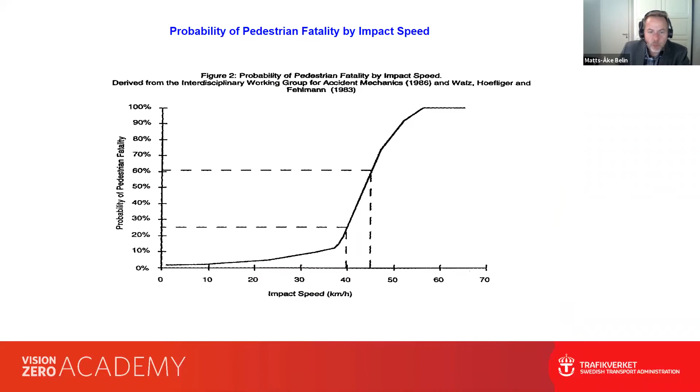And this knowledge we started to spread around the country in the late 90s, especially to our municipalities and our traffic engineers. And if you compare Sweden in the late 90s with how it looks now in some of these municipalities, you will see lots of speed bumps, lots of traffic calming, lots of special areas where you give priority to pedestrians and cyclists, and lots of roundabouts.

So it's definitely a change in the way that we design our urban areas, and we put the unprotected road user safety as number one in these cases. But for us, Vision Zero is not only about urban areas, it's a national policy. So we have to work both with the urban area and with the rural area.

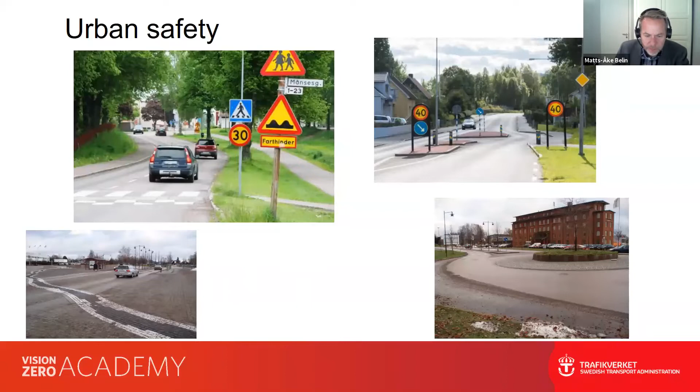And I don't have time to go into detail of everything we have done, but this is, I think, a very good example of Vision Zero in practice. Because we used to have this kind of road. They are 13 meters wide. We used to allow 110 kilometers per hour on this road. And if you calculate the number of crashes per kilometer driven on this road, you would call them quite safe roads. At least that's what the road engineers, my friends within the Swedish road administration, said. They thought that this was a quite safe road.

But if you ask the people, they would call these death roads, because now and then there were some accidents on these roads, and the typical scenario was a head-on collision where someone tried to do an overtake and then made some mistake and they ended up in a head-on collision. And due to the high speed and high energy, it was a catastrophe. Always 1 or 2 or 3 deaths or serious injuries. So for ordinary people, these were death roads, I would say.

And of course, we had a solution for this. My colleagues in the road administration wanted to see a motorway here, and we know that the motorway is very safe. But we asked ourselves, why is a motorway safe? It's because we don't have any head-on collisions. We have very safe intersections. We don't allow unprotected road users on these roads. Okay, what can we do about this head-on collision cheaper than building a motorway? So we came up with this 2+1 road with this middle barrier.

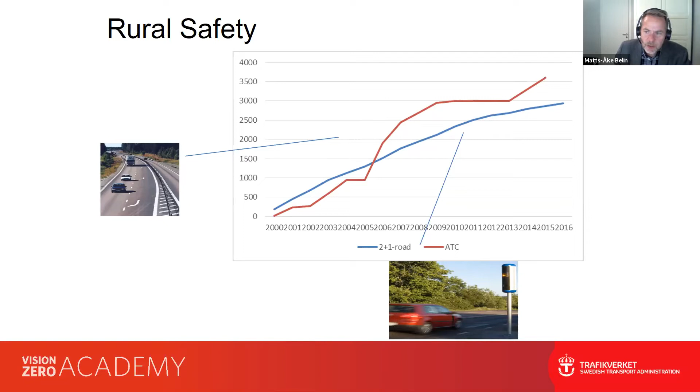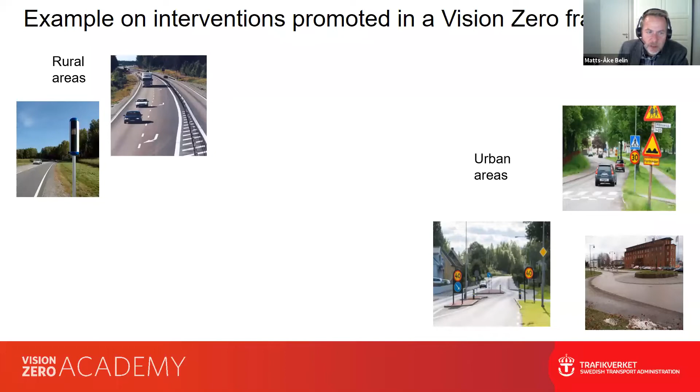So if I just wrap things up here a little bit, some examples of interventions that have been promoted in the Vision Zero framework. Of course, in the urban areas, it's very much about traffic calming and control of speed, and giving priority to unprotected road users. In the rural area, we have worked a lot with these 2+1 roads, but also with traffic safety cameras. And we are also trying to take as much advantage as we can from new technology. And there are so many things now that are so promising from a safety point of view, but it will not happen by itself.

It's very important that the safety community become more engaged in the discussion about what's happening in the car industry, and make sure that we get the intelligent speed adaptation system, that we get devices that prevent people from impaired driving and that sort of thing. There's too much talk about self-driving cars. I think there are so many other things before we have these self-driving cars. So we work a lot with that to take advantage of it.

And as a matter of fact, when we started this Vision Zero, I think it was a little bit more a kind of visionary thing, but now we get more and more serious about it, and that is due to this digitalization, because we think that there are lots of things that we can use it for. But in the middle of everything that we are doing, as I said, the main thing is to control for harmful kinetic energy. So therefore, we put the speed and the speed limits in the middle of it.

So we have started a journey now to setting the speed according to the safety design of our roads and our cars. And that means that, for example, if you are in a modern car and you have a head-on crash with another modern car, the car industry have promised us that they will take care of the problem up to 80 kilometers with the seat belts, airbag, automated braking systems, and so on. But above 80 kilometers, we can't have head-on collisions. So therefore, we need to build barriers and that sort of thing.

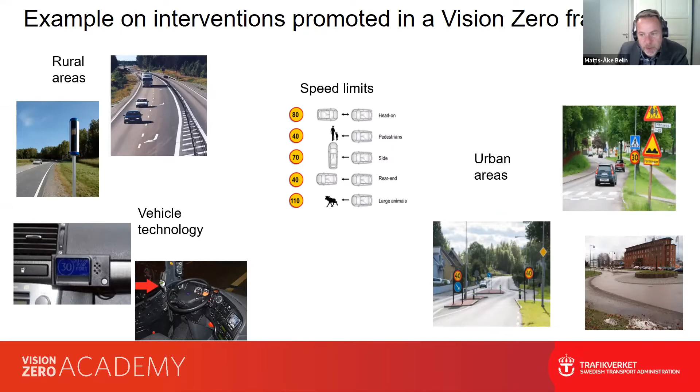So when we started this journey in the late 90s, Sweden had one of the safest transport systems already at that time. We had about 7 fatalities per 100,000 inhabitants. But the discussion at that time was that if we are top performance, we can't be better. It will be very difficult for us to get better. But we have shown now that we have gone from 7 fatalities to, in 2020, less than 2 fatalities per 100,000 inhabitants. So that just shows that even top performance countries have lots to do when it comes to road safety. And there have been lots of things that we have done on the way here.

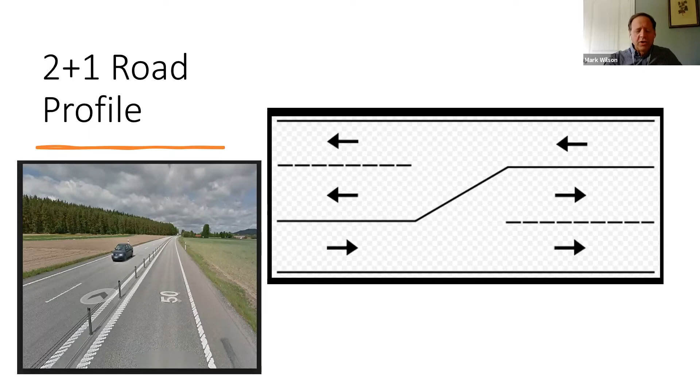Sweden has been building the 2+1 design on volume capacities between 2,000 and 18,000 or 20,000 ADT. And they've also started converting many of their 9-meter 2-lane roads. As Matts mentioned, some of the more rural areas have smaller roads, and they've started converting some of those to the 2+1 profile. These roads would require some widening to carry this out.

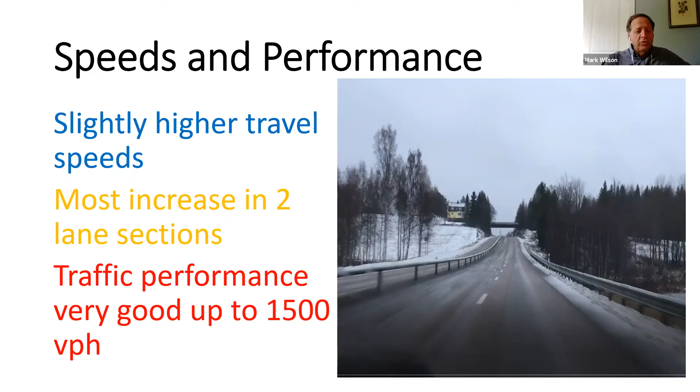The speed and performance has also been studied in various reports, and some of these reports are referenced in my report. Generally, 2+1 roads have seen slight speed increases over 13-meter roads, and most of those increases are on the 2-lane sections. Posted speeds generally are 100 kilometers an hour, and traffic performance is very good, up to 1,500 vehicles per hour.

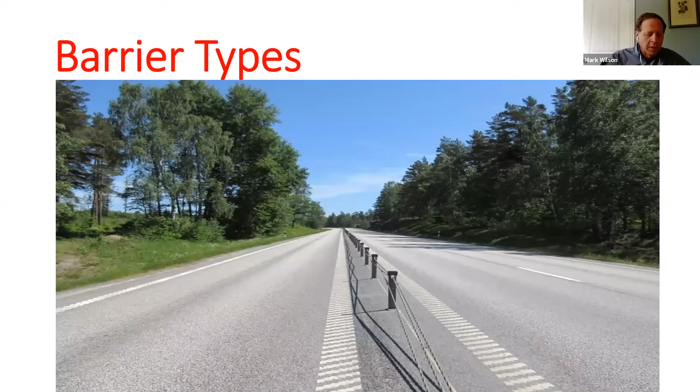Here's another picture of a high-tension cable barrier, but this is an inline style. All the cables are sitting in the middle of the post, and the posts bend when they're hit. And of course, the purpose of the posts is to hold the barrier at the proper height.

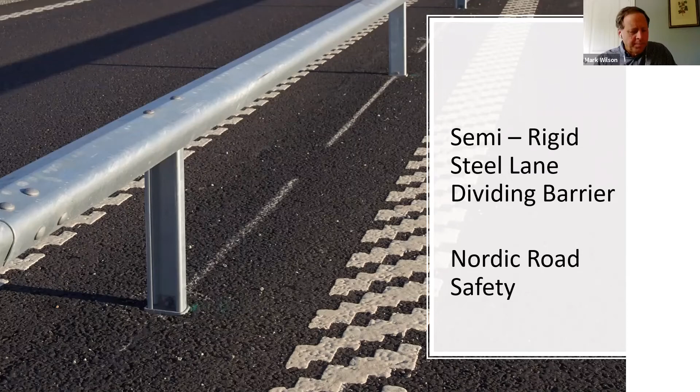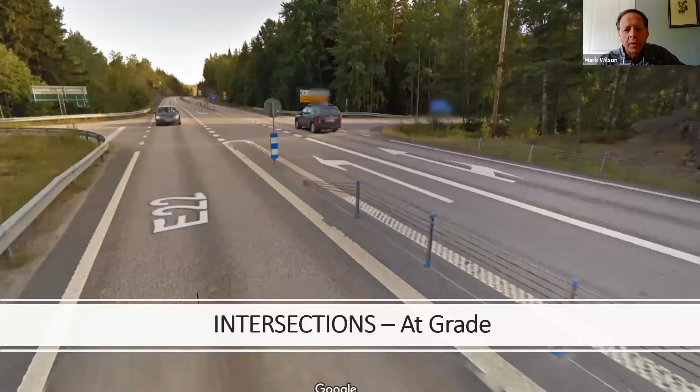So 2+1 roads can be built at a fraction of the cost, as Matt's mentioned, and they're built on an existing platform or slightly wider. And there can also be significant reduction by using at-grade junctions rather than costly grade-separated intersections. Of course, grade-separated intersections can be used as volumes increase, and the reduction of the number of intersections provides a safety benefit; it's certainly a goal we want to achieve. But the 2+1 allows much more flexibility in this process than motorways or 4-lane highways.

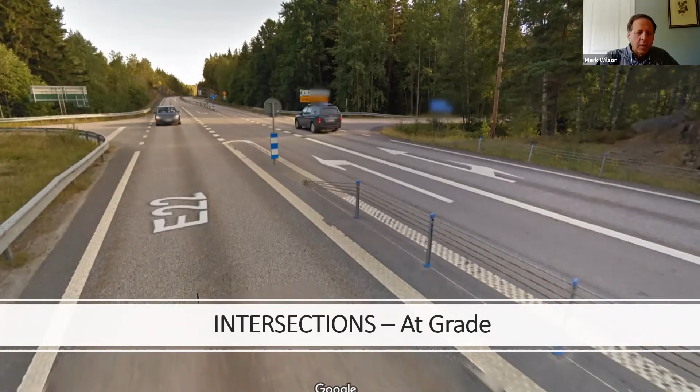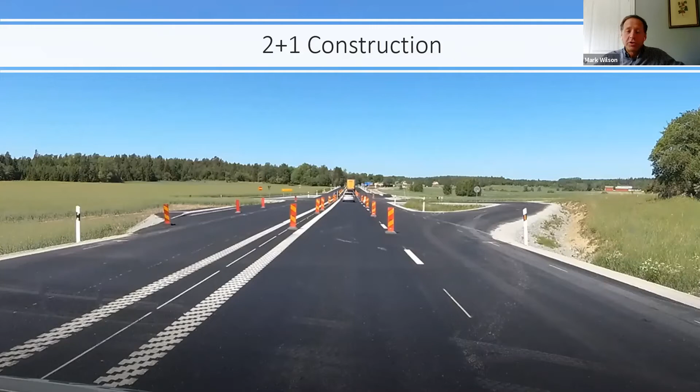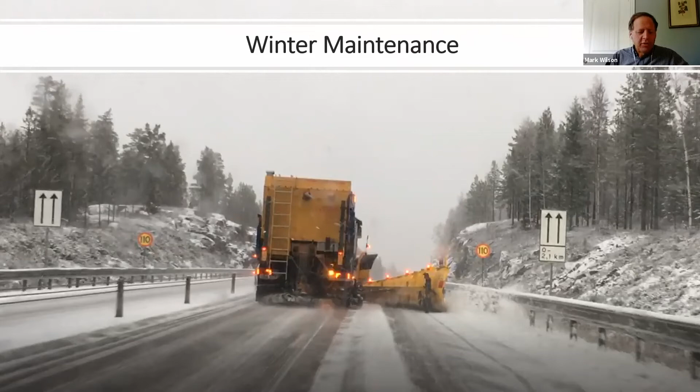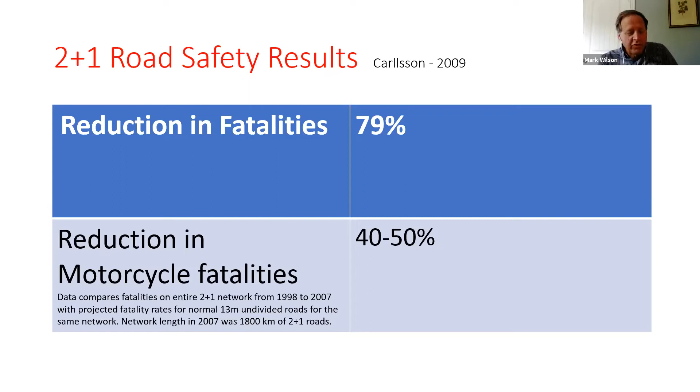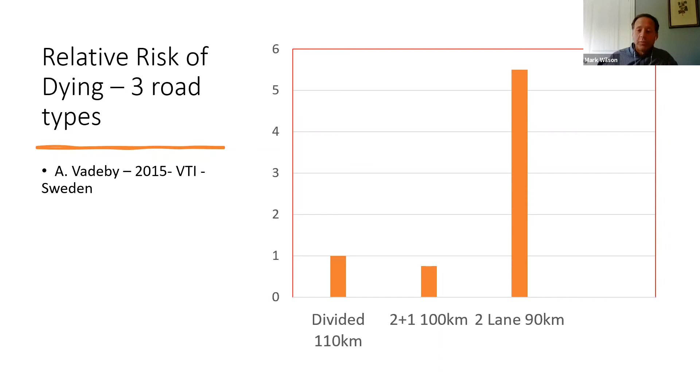So just to summarize some of the key points of 2+1 roads, as we've said, the safety results are very close to that of divided highways. They can be built at a tremendously low cost. There's less environmental impact because of that. The design can be flexible to the terrain, so 1+1 where it's difficult to expand the roadway, and expanding to 2+2 when the volumes require it, as they've done a lot in Ireland.

They're very effective on road networks, and I can say from personal experience that they're very, very nice roads to drive on, both in summer and winter, and I've driven quite a bit on them. And they continue to be built around the world, so I think others are seeing the benefits of them.